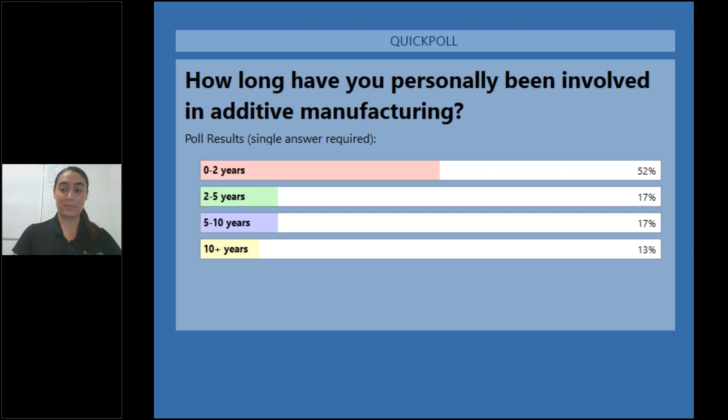So why think post-print during the design stage? According to the 2019 Wohlers report, post-printing accounted for, on average, 23% of the total part cost for polymer 3D printing. Optimizing your post-printing operation and lowering this cost is key for making additive manufacturing sustainable, and it starts at the design phase. By understanding the process your parts will go through once they come off the printer, you can make simple design tweaks to ensure your production is streamlined.

So once you're struggling to finish a part, you've already wasted your time and material resources on that design iteration. By designing a part for post-printing, you're going to eliminate the numerous design iterations you go through and achieve your customer-ready part with as few changes as possible to your first design. So this will save you money from the materials wasted on failed designs, as well as the cost associated with you spending your time designing, printing, and post-printing failed geometry.

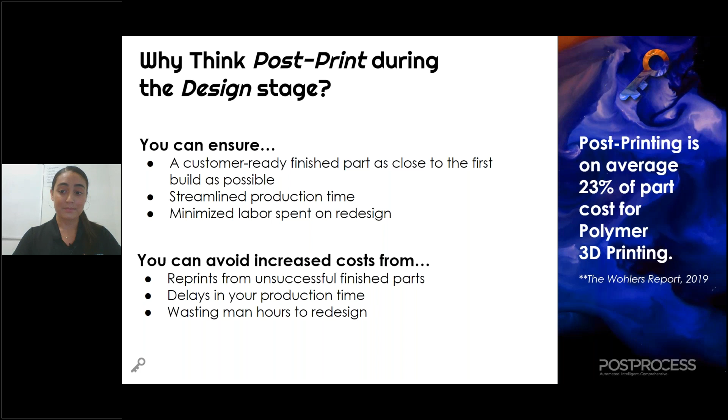So designing for post-printing boils down to 3 main ideas, the first being fluid access. When you're relying on chemistry to remove supports, it's important that there's as much support exposed to the fluid as possible in order for the chemistry to do its work. This holds true when using circulating abrasive media to achieve a surface finish. In a later slide, we're going to talk about some specific design tweaks that help maximize the contact of the media to ensure you get the most uniform finish.

The way that you orient your part is largely going to affect how much support is required as well as the quality of that surface fresh off the printer. And lastly, understanding how to design for additive manufacturing and the different nuances of your printer is going to be key to optimize your production. Unfortunately, this does take experience with the printer and understanding when the software may be overcompensating with support. And the more time that you spend printing and experimenting, the easier this is going to get.

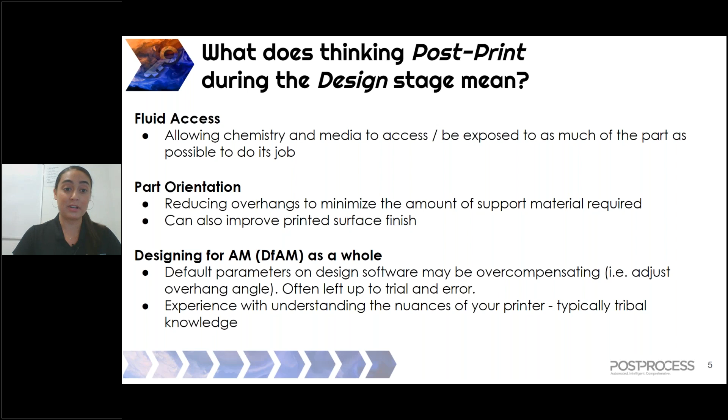So personally, what is the most troublesome part of your post-printing operation? So what causes you to redesign and rebuild your part? Is it the support removal process? Is it the initial surface finishing or potentially a surface finishing process that you're undergoing? Or are you struggling with resin removal?

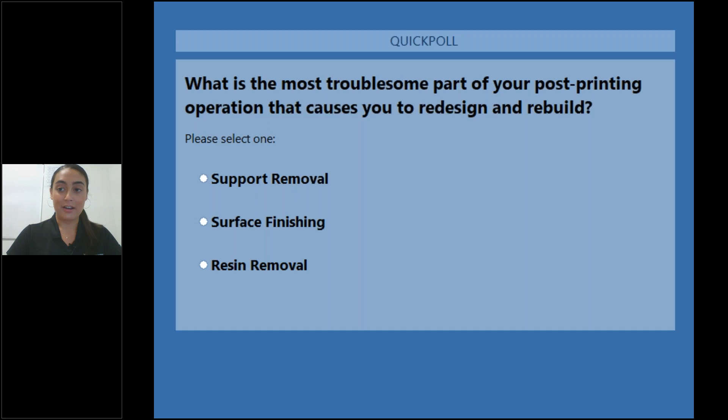We'll take another quick moment here to let everybody submit their answers. All right, let's look at the results. Great. Again, so more distribution, a little bit heavier on the surface finishing side, which is great because I'm going to talk specifically about how you can design your parts to help optimize that surface finish.

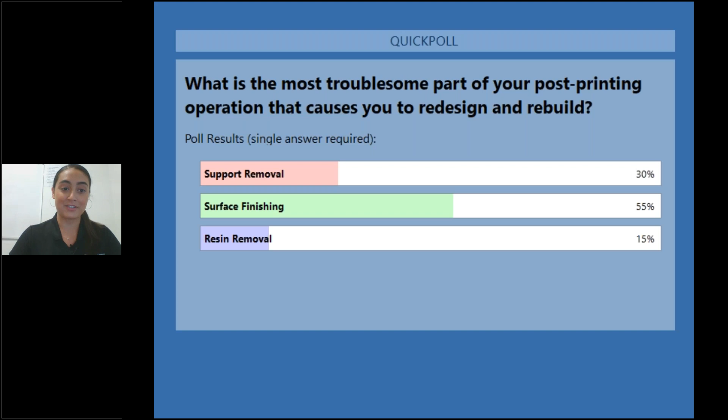First, getting started with PolyJet. Post-printing for PolyJet generally involves some level of picking of support, whether with a water jet or using hand tools, or potentially on the less manual side of things, a submersion tank. So looking at either of those processes, the fluid access is key for achieving a fully clean part.

Design features like dead-end channels make it extremely difficult to achieve that fluid access, so I recommend, when possible, remove dead-end channels, or if they're required for the design, consider adding a drain hole to allow maximum potential for fluid exposure.

As well, when designing PolyJet builds, you have a support material matrix, and you have options for that matrix that allow for different levels of build material to fortify the strength of the support. You're going to want to use the least amount of build material in that matrix without compromising the integrity of the build. This is because the more build material used, the more difficult the support structure is going to be to remove.

So lastly, here at Post-Process, we've introduced plugs into the features with large channels that get removed prior to post-printing to help speed up bulk removal without breaking the part. So if you look at the photo on your screen, you'll see a black arrow that's pointing to a support material that's inside the main build. So what that is, that's the plug.

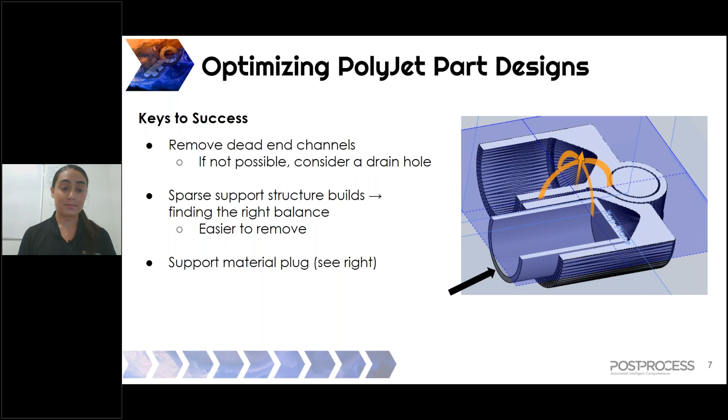So now moving on to FDM. Most commonly, in FDM post-printing, users are either manually removing the supports or using a submersion tank. Again, this creates fluid access issues when post-printing. So allowing the chemistry to access as much of the support as possible is why removing those dead-end channels or adding a drain hole for detergent flow is so key.

So with FDM, you have the ability to print material at a lower density to reduce your material usage. Parts printed like this are known as sparse builds. So ensuring these parts have as much fluid access as possible so they post-print quickly and are exposed to detergent for the least amount of time is extremely important for speeding up your printing production.

The less time spent soaking in the detergent means you're going to reduce the amount of time that you spend waiting for your part to dry. So reducing this dry time is really going to speed up the entire production.

And finally, when you're looking at the photos here, you can get the most out of each build by stacking your parts and using the height of that build envelope. So this in turn is going to simplify your post-printing because the build material from other parts acts to support the build and minimize the amount of support material needed, and therefore the amount of support material that has to be removed.

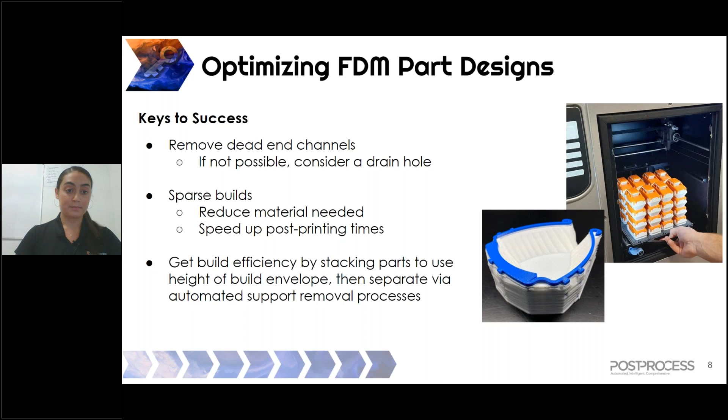Talking about resin-based printing, support removal and resin removal are two different processes that must be looked at individually. So with resin-based printing, since the supports are made of the same material as the build material, we can't use chemistry to remove them, so these parts should be designed for easy access to the support. Most importantly, this means having as few internal support structures as possible.

And then when it comes to resin removal, understanding the properties of each resin and what fits your application best is important because some resins are more difficult to remove than others. Higher filler resins such as Accura Bluestone or HPC, while they have great temperature resistance and strength, they're extremely difficult to clean off of a printed part.

So without the proper cleaning solution, small and deep channels will be nearly impossible. So you're going to have to avoid these when you're building your design, if you haven't found the right cleaning solution, that is. However, there are solutions designed specifically with these resins in mind. So once you've implemented this, you'll be able to regain that design freedom.

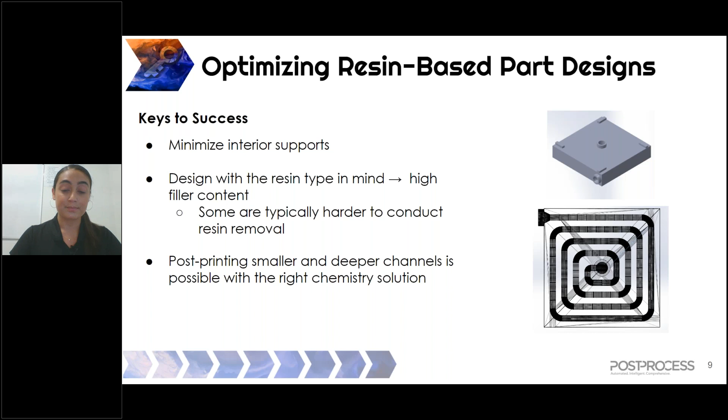When it comes to surface finish, there are steps that you can take so your part comes off the printer with the best possible finish. And as well, there are post-printing options for surface finishing to help improve that finish even further. So to get the best finish straight off the printer, you're going to want to limit, whenever possible, angles 45 degrees and over. These create very large steps, which are extremely difficult to finish, even with an additional surface finishing step. As well, your print orientation is key when it comes to surface finishing.

So then in regards to designing for post-printing, introducing filleting, which is the rounding of corners, is going to strengthen your part while allowing for better media contact so your surface finish is as uniform as possible across the entire geometry.

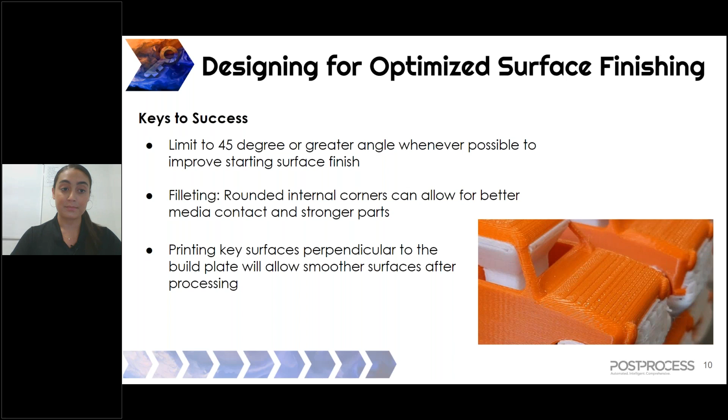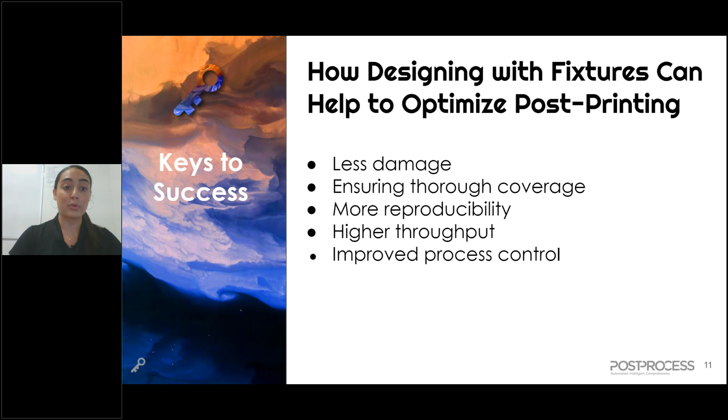So now we're going to move on to how designing fixtures can help optimize your post-printing by mitigating damage issues and ensuring you have full coverage of your part. You will also have more reproducibility by increasing your batch size, which is also increasing your throughput while giving you that improved process control. So specifically, I'm going to be talking about what we do here at PostProcess when it comes to resin removal. So we utilize our submersed vortex cavitation technology.

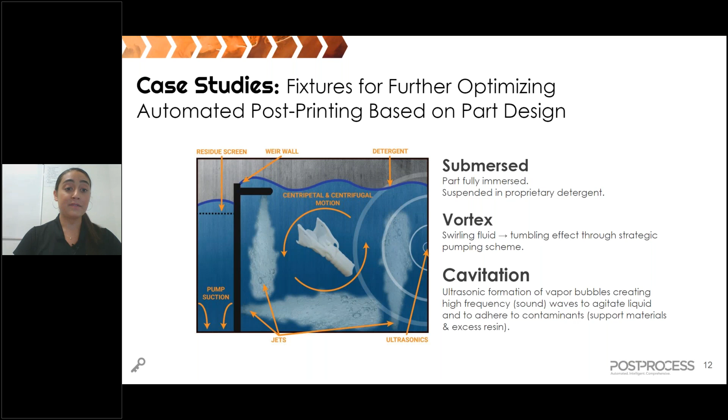So now you don't just have that bottom rack or potentially a basket, you can layer multiple trays and take up that entire build envelope. And as well, you're going to be cleaning parts at the same time that you're cleaning your build tray. This is really going to maximize your time. And additionally, since that part is still attached to the build tray, any parts that have really fine featured details that you might not want knocking against a basket or another part, having it fixed to that tray is going to protect these fragile geometries from any damage.

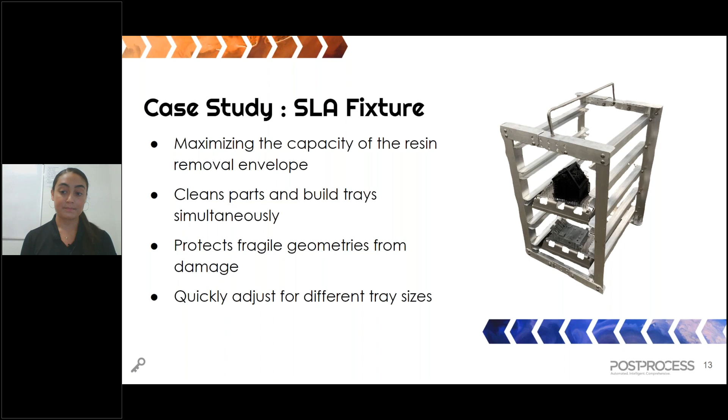So to summarize all of these benefits, overall, implementing these really small changes to your part design is going to help your printing production become more sustainable by reducing material waste, as well as minimizing your energy usage and saving your time. This is going to allow you to have more successful builds that require less time to post-print, in turn increasing your efficiency and allowing you to grow your throughput. So in combination, these benefits will streamline your production while saving you money and time.